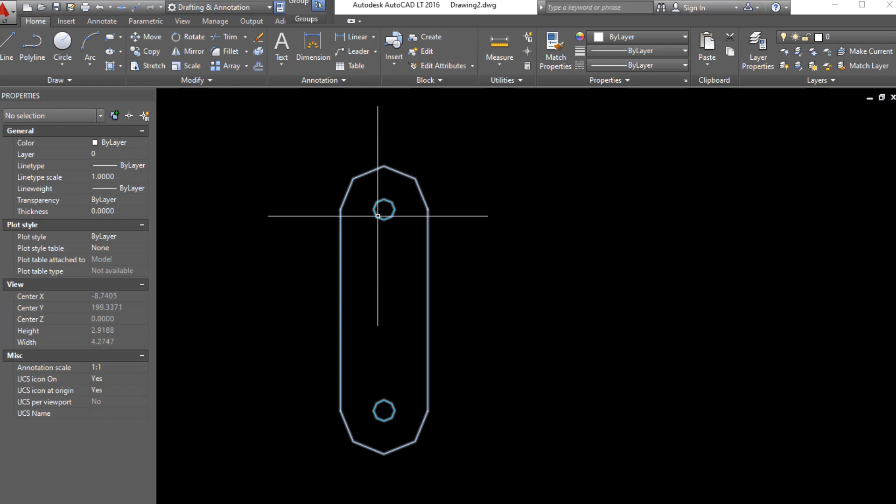And just for laughs, I threw in a couple of little circles there, and that'll represent a few holes that we could drill on the back to make installing that bracket easier. And as you can see, this has been turned into a block, which is really essential. So let me pull in another block that I made up. And let's see, 4x8 only.

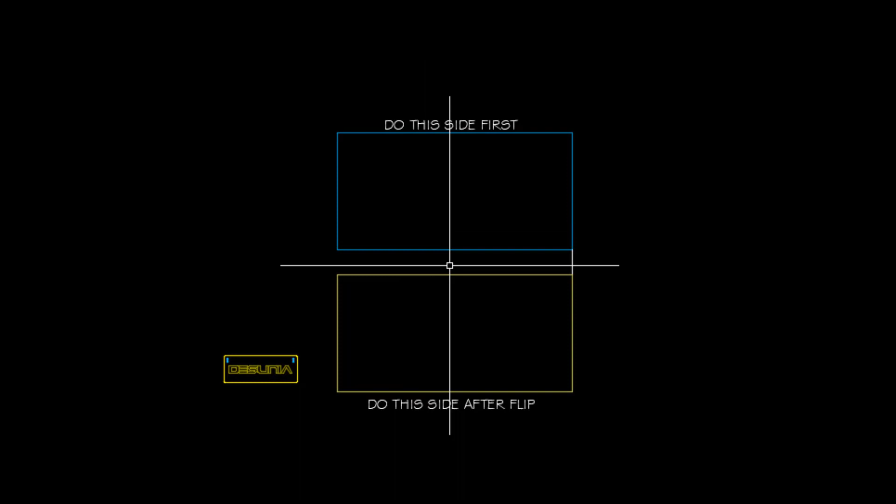Now we could look at this in two ways. One, a perfect world, and then an imperfect world. So we'll talk about perfect world first. And in that perfect world, when you order material, it is exactly the size you're expecting. So these two rectangles I drew here, they're both 48 inches by 96 inches, and that material comes to your shop exactly that size. So for now, we'll pretend that that's actually going to happen, even though we know it's not. So let me grab this block, and I'll move it over to the corner.

And let me make some copies of it. So I'm going to grab it like so. Whoops. Let me put that there first so I can move it the right amount. So I'm going to move it 0.55. So in other words, I'm using a 1/2 inch compression bit, and I want to give myself another 50 thousandths to allow for the lead in that I want to use.

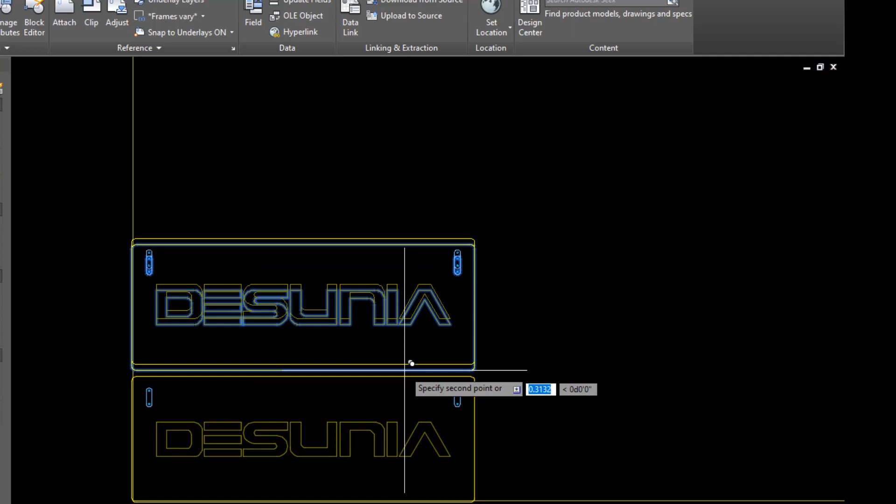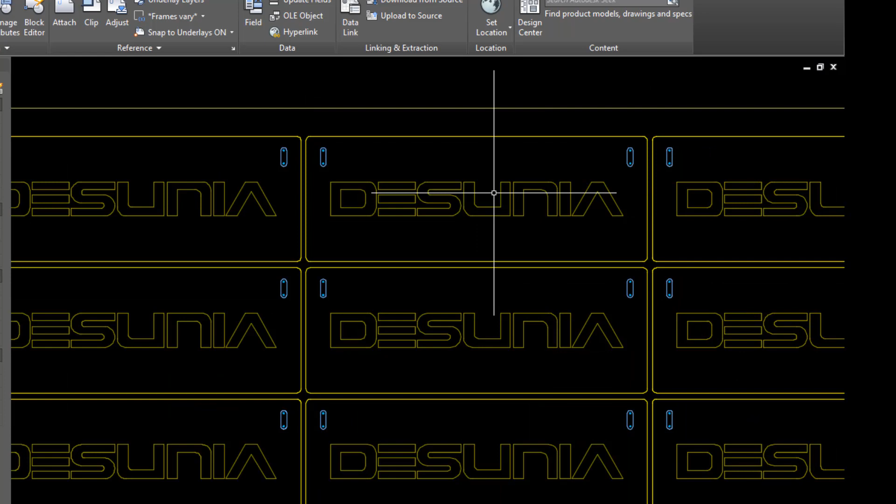So let me make two more copies like so. And then we'll make a couple of copies like so, move it that 55, and then one last copy. Okay, then the last thing, I'm going to grab it all, and I'm just going to turn ortho off for a moment and basically center it kind of sort of in the middle of the board.

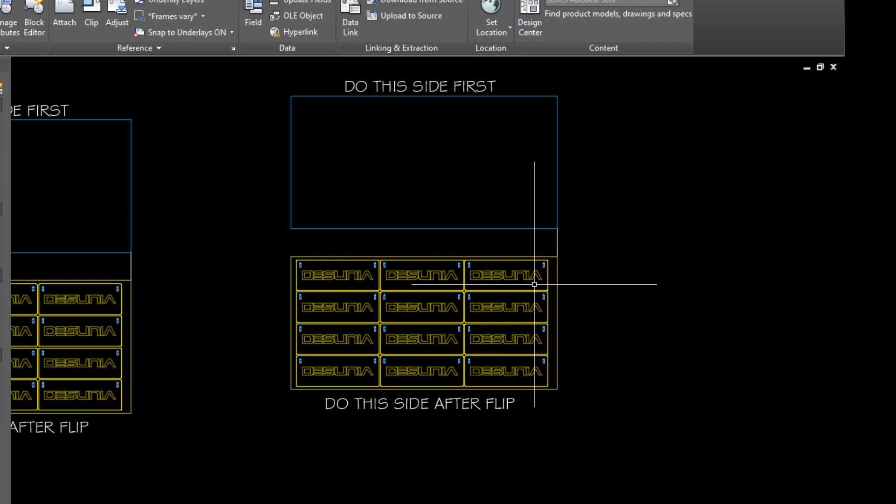All right, now that I've got that done, let me grab this whole thing, make a copy of everything, and push it to the side just in case all hell breaks loose and we need to start from scratch. So all I have to do now is I'm going to take all my geometry and I'm going to explode it. So let me hit the explode. Okay, now it's all exploded.

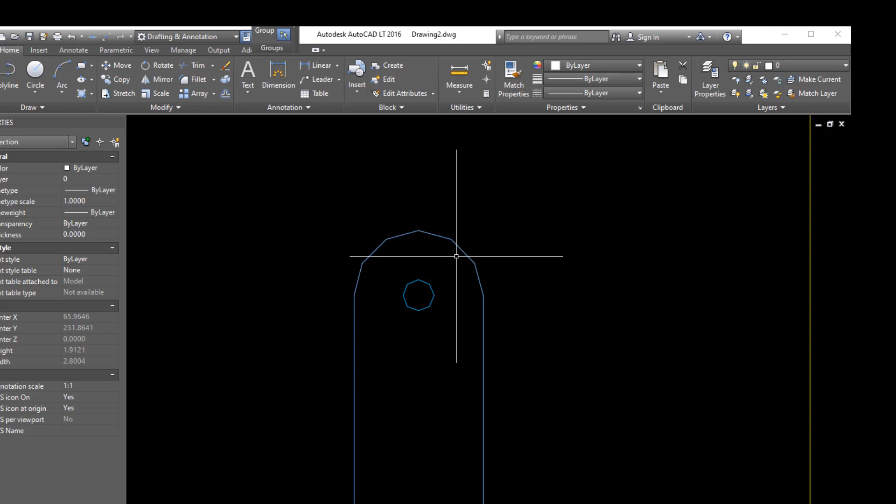So the key now is I want to take everything that's going to be on the back and mirror it to go on the other side. So let me just grab this. And this is actually, believe it or not, two different layers that I made up. And you'll notice they're similar in colors. I should really back up for just a moment. Let me show you the layering scheme that I used.

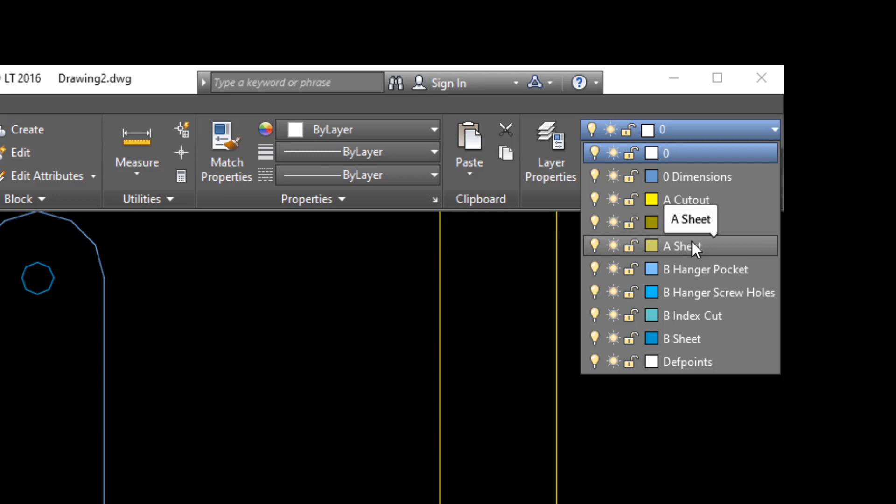Everything that's going to be on the back of the sheet, I put a prefix of B because AutoCAD is going to alphabetize all of the layers, so it'll group them all together. And everything that's going to be done after flipping, I started those layer names with an A, and as you can see, I use similar colors, sort of in the same family, to tell which is which. Okay, anyway. Let me grab these, and I'm going to isolate those two layers.

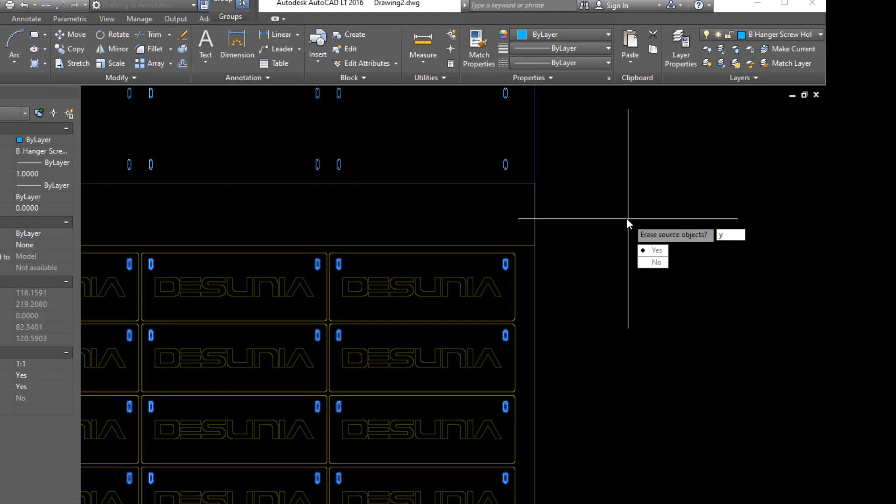Then I'm going to window them, mirror, and I'm going to go to the middle of this line that I have here that's connecting these two rectangles. Turn ortho back on, obviously. And yes, I do want to get rid of the source geometry. And now I'll unisolate everything.

Okay, so what do we have? Well, we have simplicity itself because we're really done. So when I bring this geometry into AlphaCam, and again, your CAM software might be different, but I use AlphaCam. I'm going to bring it in, and I'm going to put this corner at 0, 0 in AlphaCam and do all this machining. Then once that's done, I'm just going to flip it over end for end.

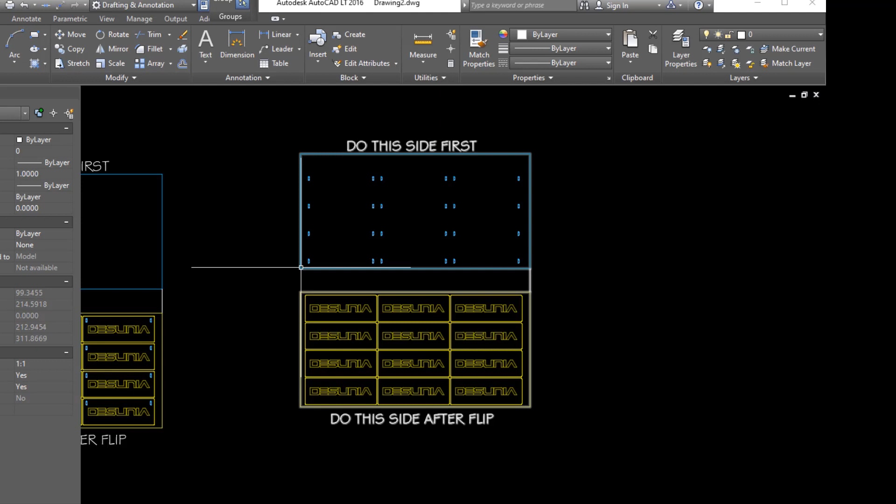So this corner here will become the bottom corner when it's flipped. And all I have to do then is first machine the name, and then I'll make my cutout, and all my parts will be done. Now, I mentioned before that this is for a perfect world, and we know we're not in a perfect world. So let me dump all this all together. And I'm going to just make a copy of these. Actually, I'll just move them.

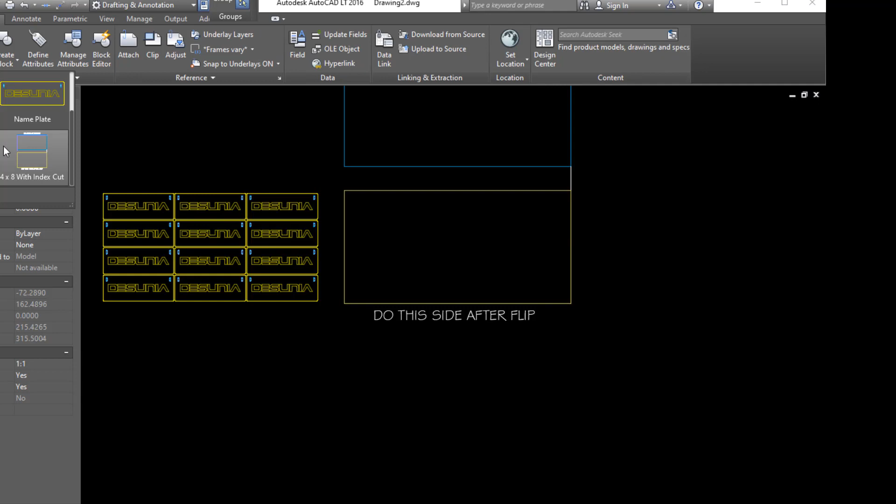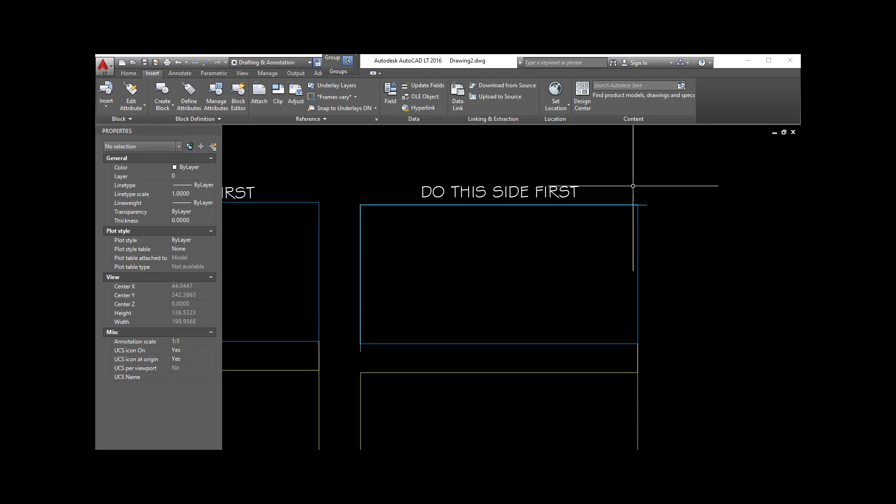And I'm going to bring in another block that I made up. And this one has a little index cut that I made up. Now, remember I mentioned before how these two rectangles on the left, they're both exactly 4x8 or 48 by 96. What I did over here is I started out this top rectangle. That is exactly 4 by 8. But what I did was I took another line and offset it 1/8 of an inch from the top and 1/8 of an inch from this left side.

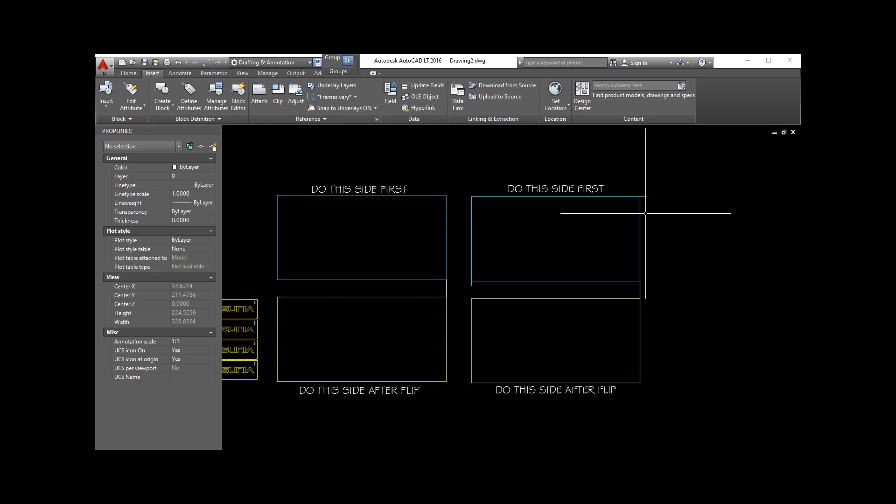So when I'm done machining that first round, the next thing I'm going to do is take my compression bit and I'm going to go on this line and create an index cut going along the top and along the bottom. Then all I have to do is take my sheet, flip it over, and then I'll be able to machine the face. So what it's really doing is it's turning my board that was 48 by 96 into a board that I know for certain is 47 7/8 by 95 7/8. This way I know when I flip it over, everything's going to be as it should be.

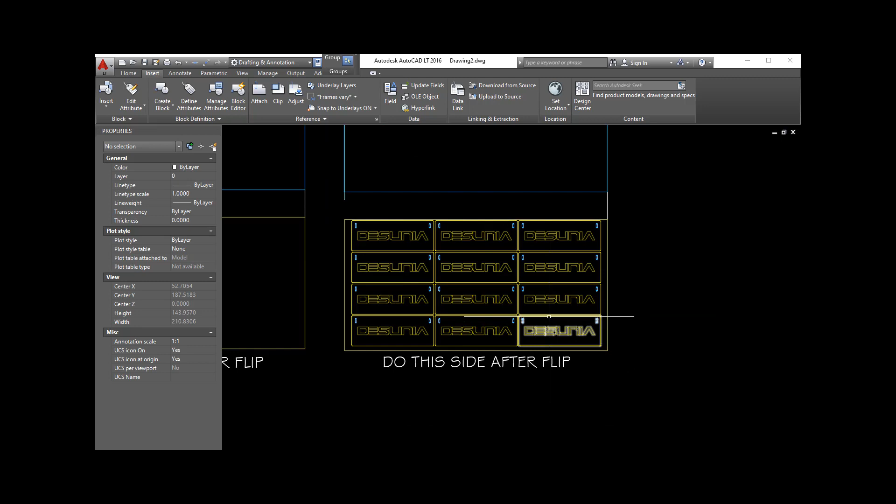So let me just show you just quickly how this is going to happen again. So I'll move it over. And this is a good example to show you just how easy this is one more time. So again, these are still blocks. So I want to explode them. Oops. Explode them. Then I'm going to isolate these two layers. Then I'm going to window everything. Mirror to the middle of this line. Ortho on. And yes, I want to delete the source objects. And then I unisolate everything.

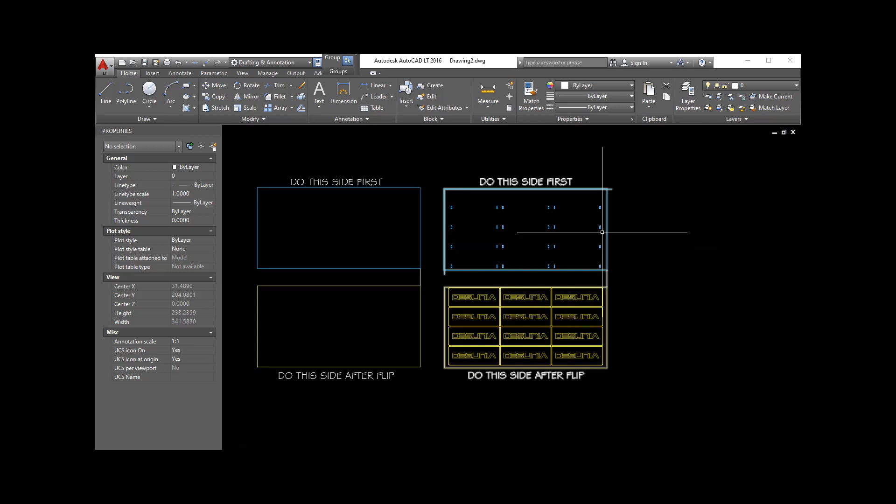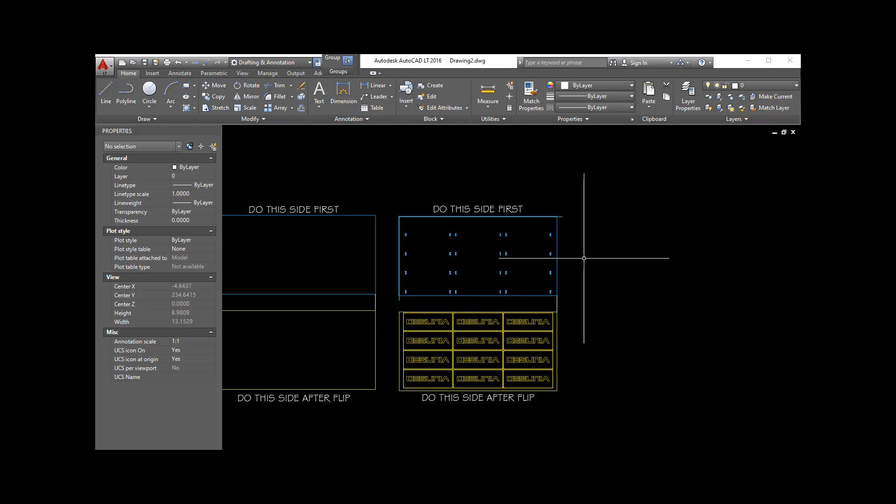Okay, so again, when I bring this top piece into my CAM software, and again, I use AlphaCam, I am going to index onto my router this point right here. That's going to be 0, 0. I'll do all this machining that's on the inside of the board. The last thing I'm going to do is cut this index line using my 1/2 inch compression bit. Then I'll take the whole sheet, flip it along this axis. So now this corner right here, that's going to become 0, 0 when I flip it over to do this machining over here. And that's really it.